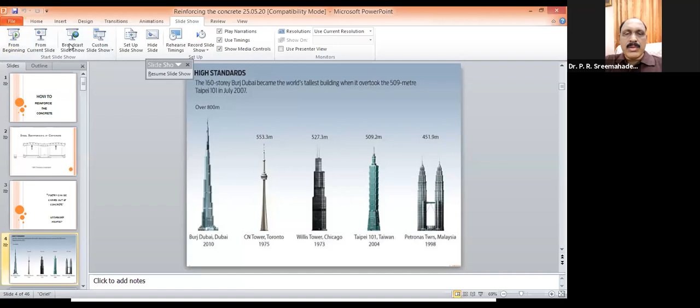See the screen - how to reinforce the concrete. Especially civil students at a BTech level, in the third and final year BTech, they study a lot regarding how to reinforce the concrete.

But long back, thousands of years back, there is a reference to cement in an Indian book which nobody knew about till recently. For example, there are 4 Vedas: Rig, Yajur, Sama, Atharva. For each Veda there is what is called an Upaveda, meaning a sub-Veda. There is a sub-Veda called Sthapatya Veda, which is an Upaveda of Rigveda. In Sthapatya Veda, there is a mention that a cementing material can be made by burning selected rocks and limestone and adding some softness to it. That is exactly the procedure which Joseph Aspdin used. So though it was given in Sthapatya Veda - the first ever written civil engineering textbook - since it was in Sanskrit and was not available to Westerners nor even to Indians because of the language difficulty, nobody understood this. But even now, you can go to the Sthapatya Veda and learn how cement was used in those periods, for fixing idols in temples, big statues, etc. Forget about that.

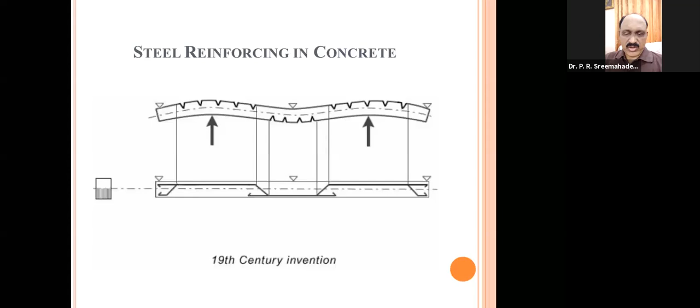But from all other physical concerns, we identified that steel is the best material for reinforcing. That is how RCC became synonymous with steel reinforced concrete. RCC stands for reinforced cement concrete, but reinforcement is by and large 99.9% steel from then to now, even now. Of course, the procedure has changed, that's all. Now come to the next slide. You see the next slide.

It's a quotation from Le Corbusier. Le Corbusier is one of the most vociferous and most imaginative architects the last century has seen. He's a French architect, and he has left a lot of marks in India. Many of the historical buildings in India have been by him. And the best example is the planned city Chandigarh.

Chandigarh is the best planned city in India. So many other planned cities are there, but Chandigarh is the role model for them. That was designed by Le Corbusier. So he has said that poetry can be carved out of concrete. Now let us see how this poetry will look. The next slide will tell you.

See the next slide. That slide is some of this poetry. 5 samples are given. The tallest among them is Burj Khalifa Tower. In that diagram, it is written as Burj Dubai Tower because till 2010, before it was commissioned, it was called Burj Dubai Tower, but then it was sold, so it is called Burj Khalifa Tower. That is the tallest with a height of 830 meters. And next comes CN Tower Toronto with a height of 553.3 meters.

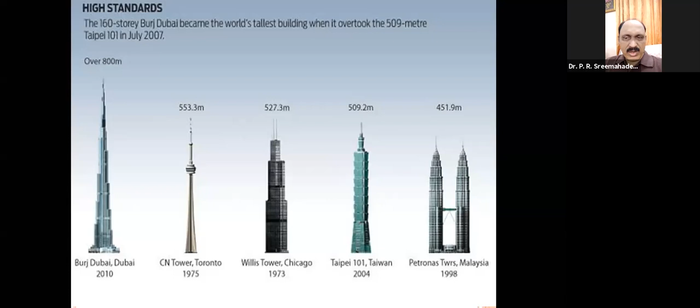Now come to the next slide. This you can see on the left side, that is a steel spire on top of the Burj Khalifa Tower. That is 244 meters tall, and it weighs around 4,000 tons, or simply 4 million kilograms of steel. And it is specially treated steel. It will not have rust. It is stainless steel basically, but structural stainless steel. There are two different types of stainless steel: structural and non-structural. Structural stainless steel is a costly affair.

For example, you know that the oldest iron pillar, which is rustless, is in India. If you go to Delhi, you can see the iron pillar, which is over 1,000 years old, which has not yet got rusting on it. Non-rusting. That means Indians were the first to invent stainless steel, but Westerners don't accept it. As per them, it was invented in the West. You can read in the textbooks. But we have got a standing testimony to a stainless steel pillar, standing still in the country.

Okay. Now, the total structure, you see the right side of it, that is the foundation of Burj Khalifa Tower. I just wanted to tell you how tall buildings have the foundation and top. That's why I explained this. Actually, this is not the best example to explain RCC that I am coming to. But you see the right side, it is supported on steel piles, round piles. Each pile having 1.5 meter thickness. 1.5 meter means around 5 feet.

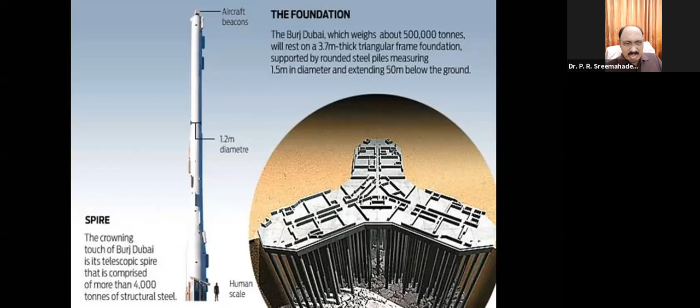Now coming to the next slide. All this that I told is just to inspire you to see that civil engineering can make such wonders. Now we are going to the ground reality.

You can just message whether I can continue with the same pattern or I have to change my pattern. Just put a chat to everyone whether I can continue the same pattern or you need a change in my explanatory style. Let me see what your response is. Okay. Everybody is saying that it's okay, they're listening, they can continue.

Now let us go to the real topic which I wanted to discuss today. Whatever I told so far, anybody could understand. But what I'm going to say hereafter, everybody may not be able to understand. Please forgive me because it is a hardcore subject. Only those with a basic civil engineering background can understand, especially those who have completed a BTech course in civil engineering, are studying final or pre-final year, or are working as or teaching civil engineering. Others can just listen. They may not be able to conceive it totally.

This is the cross-section of a T-beam, which everybody knows once they start the design of structures. It has two parts. The top portion, which is wider, is called the flange, and the bottom portion is called the web.

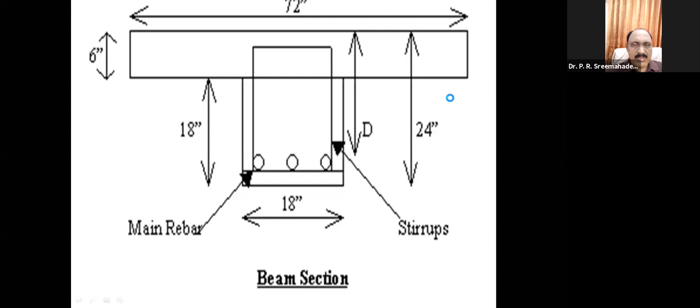Yes, this is a slide I was talking about. Normally, I don't operate the slides because while operating the slide, I cannot concentrate on the speaking. That's why I have asked the coordinator to operate the slide, so the coordinator can listen, and whenever I say next slide, you can come to the next slide.

Whenever you give a design to a contractor, the contractors may not be able to understand the theory well, but they can easily understand these drawings because they are used to using these drawings. So whenever you give drawings, that is meant for its use in the field, not in the room, they use it definitely in the field.

And earlier days we used to draw all these things by pencil or by black pen and used to give it. Then we used to duplicate or triplicate by taking blueprint or photocopy. But now we have got drafting facilities, softwares are there with drafting facilities. Now we go for software. Most of these drawings are done in AutoCAD software because AutoCAD is the best software for civil engineering drawing. Now software like BIM and all are coming with so many piecewise softwares, but even today, AutoCAD is not replaced as a software for building drawing.

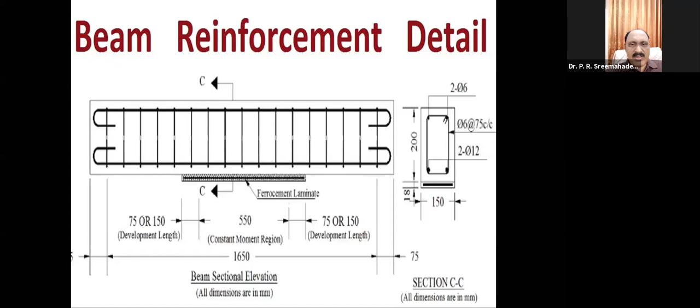But what we people do nowadays is we make somebody draw it, we check it and ask them to upload it. That you can do if you can afford it. But that's the secondary stage. Now come to the next slide.

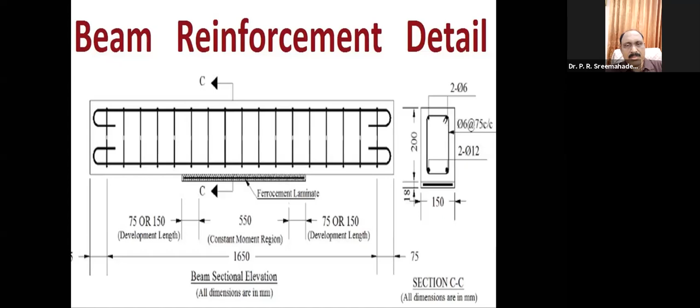See this slide. This is how a submission drawing will look like. This is only a small example. I'm not going to explain this drawing because I just wanted to make you see that such drawings we make. We have to make such drawings. Normally, earlier we used to make it in A1 or A2 sized drawing sheets. Nowadays, you can make it in A1 or A2 or A3 size. Even some of the corporations accept A4 sized drawings.

You can give it on AutoCAD itself, you can upload it on their website. They'll use it. So this is how it will look like. I'm not going to explain this because that takes a lot of time. I'll explain from the next slide onwards. Next slide, you have to change the slide.

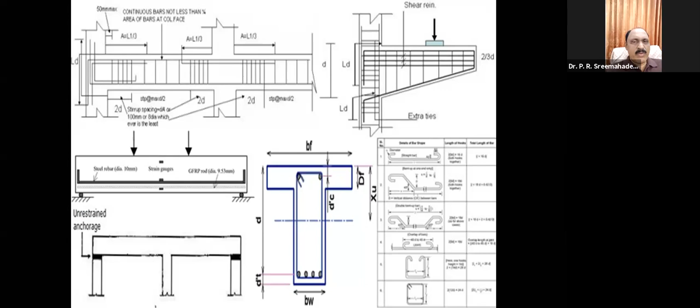There are different kinds of support in a structure: the hinged support, the roller support, the fixed support, the semi-rigid support. But this is a type of support we assume as a hinge for the analysis part. Wherever you go for construction, you cannot see this. You will see the bar from the column coming down up to the bottom and having a bend-up end there. That is what you usually see. But that is not theoretically correct.

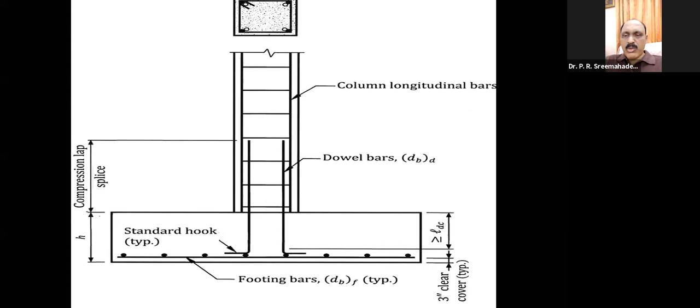You see the top style of reinforcement. That is what people normally give, but that is wrong. Structural engineers who study fracture mechanics, I think at BTech level fracture mechanics is not there. At MTech level you study fracture mechanics.

There, the stress concentration will happen and it will crack. Cracking of concrete is never advisable, especially on top, because any crack in the concrete is a point of entry of water and air. And if water and air enters concrete, the reinforcement will rust. And reinforcement rusting is such a ridiculous phenomenon, because a 6 mm bar can become a 20 mm diameter bar after rusting, and it will bulge out the concrete and the concrete will break.

Thereafter, the rusting of steel is an electrochemical reaction. If one end of a steel is rusted anywhere, the entire structure connected will be rusted, because all these steel bars are connected by stirrups and ties, and at least the binding bars will be there between the bars. Even the binding bar which we use there, that is also a conductor. So electrochemical means any conductor in between, it will conduct the rust. And rust, you know that electrolysis happens in the rusting, and it can travel from one end to the other. So nowhere in the concrete, crack is advisable.

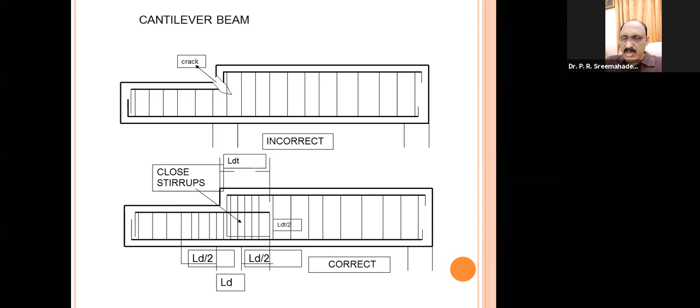Now coming to the next diagram. This is correct and wrong. Correct is the bottom diagram and wrong is the top diagram.

Structural engineers know how this crack develops because they know fracture mechanics. But BTech students will have a doubt why over the center support the crack is developing. I think normally they believe that over a support the crack may not easily develop because it is a supported plane.

What happens is, normally in any structure the columns at the ends will have less modulus of rigidity. Modulus of rigidity you have studied in design. They have less modulus of rigidity compared to the center column. So what happens is the deflection—see, any material deflects, whether it is a beam or column, it is supposed to deflect. I told that Burj Khalifa tower, one side amplitude is 4 feet so that it can move 8 feet apart.

Even a simple beam, for example you have got a beam of 4 meter span in your room, that can deflect more than 1 centimeter without anybody knowing it, because L by 250 is the permitted deflection. So even if your beam of 4 meter span deflects by 1 centimeter, there is nothing wrong in it because by its nature, by its design, it is permitted to deflect.

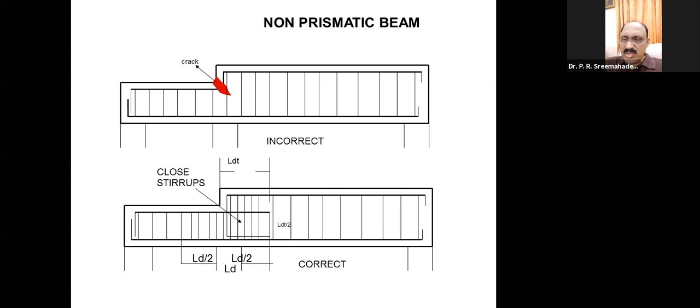For example, in slab design, there is a typical type of slab with grid beam design. In one hotel in Palakkad, I have designed such a beam because they didn't want a column inside. So they wanted a grid beam so that there is no column in the hall. So grid beams can be used for high span.

For example, any span more than 5 meters is uneconomical for a supported beam. If it is more than 5 meters, the depth of the beam will be very heavy. Earlier in working stress method, a 5 meter beam used to have around 40 to 50 centimeters depth. But now the depth can be reduced because the limit state design reduces the depth. One more thing is the material quality has changed. Earlier we were using mostly M15 concrete, but nowadays we are using M20 and M25 concrete, and steel also.

At those times we were using mild steel. Mild steel has either 250 or 320 range permissible tensile stress, Newton per millimeter square. Now we are using high yield strength steel, HYSD steels and TMT steels. Available TMT steel now in Kerala is around 600 Newton per millimeter square, almost 2.5 times what we were doing then. So because of that reason, now the size of the cross section has reduced.

But even then, once I had a requirement for designing the Anakotil of a temple. Anakotil is a hall where the elephant stands and so many people will be standing. So its span has to be around 20 meters, and they wanted it without beams. So for such things we can go only for grid beams and grid slab. So such cases are many.

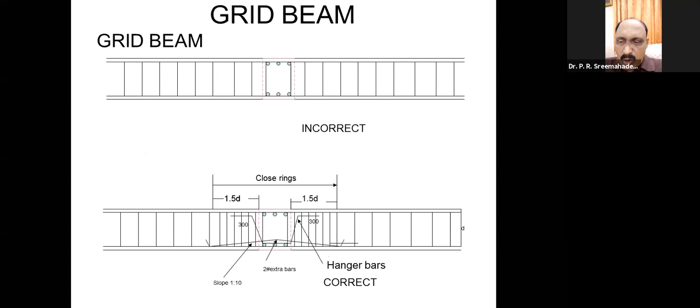Now come to the next slide. This is the case when the sub-beams, also called secondary beams, have a lesser dimension or lesser depth compared to the main beam. Say for example, the main beam is 30 centimeters, and the sub-beam web is only 20 centimeters - it will look like this. See here how it is done. Again, self-explanatory - those who have studied the fundamentals of engineering graphics can understand this. Just see it.

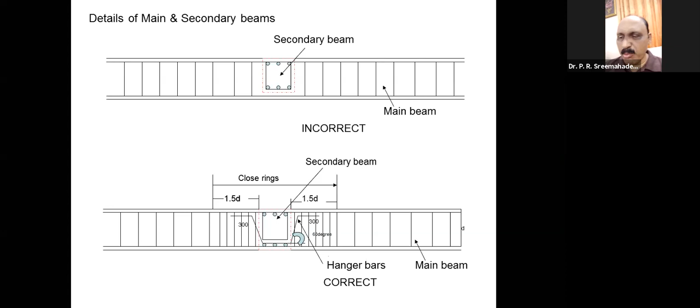But never do that theoretical bending, it is dangerous, because due to many reasons, the point of contraflexure may have a slight change - that's the first thing. Second, nowadays we don't bend the bars like this, but I've shown bending because it's easy to show. You can just cut the bars, that is what people do - cut it at bottom and cut it at top, but never at the same level. You should cut it with extra development length on both sides.

Otherwise, there is a phenomenon in concrete called pull-out, which is very dangerous. So many research theses have been done on the pull-out phenomena - I think in Anna University itself, I could evaluate 3 PhD theses on pull-out behavior of concrete. So definitely the bars will pull out. Nowadays the pull-out danger is less because we are having twisted bars - most of the HYSD bars or TMT bars have a Tor mark on them, a twisted mark, which improves the bondage. Bond strength will be improved compared to mild steel, which was very smooth.

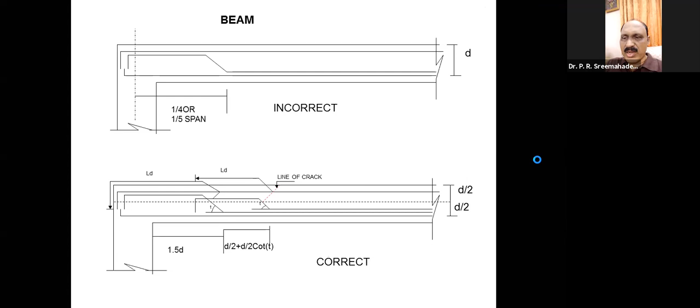You see here, most people just take span by 4 for cutting - span by 4 means 0.25L. If you take 0.25L, they feel it is all right, but it is true only for long beams. If the span is very less and the load is very high, especially in beams like bridge beams, this becomes very dangerous. Say for example, a span of only 2 meters but the load is very heavy - cutting it at 0.5 meters will not be safe for the beam.

So it is suggested that even if you see, for example, the bridge, the depth of the beam will be very high. I just got an example. Recently, I had to design a bridge where the depth of the beam is almost 2.5 meters. See, your height will be around 1.5 to 1.8 meters. The depth of a beam in that bridge is 2.5 meters. So bridge beams are normally like that.

Even with the latest limit state we are designing, earlier the bridge beams used to be 3 or 4 meters sometimes. There are bridges like that. But pre-stressing can reduce the depth of the beam a lot. That's why we prefer pre-stressed beams nowadays.

Most of the newly built bridges are pre-stressed, and you could have seen that the metro and all are using heavy beams, but the depth is not more than 2 meters anywhere, 1 to 2 meters only, because it is all highly pre-stressed with high quality tendons with high yield strength capacities. That is different. But these are all usual things.

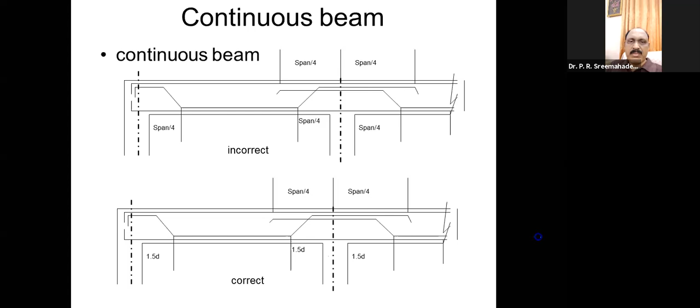If at all you see any crack, fill it with filler material immediately, even if it has no structural purpose. You know very well it's not going to affect the structure immediately, but you close it. So many gel materials are available now. Nowadays in the market, you get spraying type materials, all nano materials, which you can just spray over to fill the gap so rusting can be prevented.

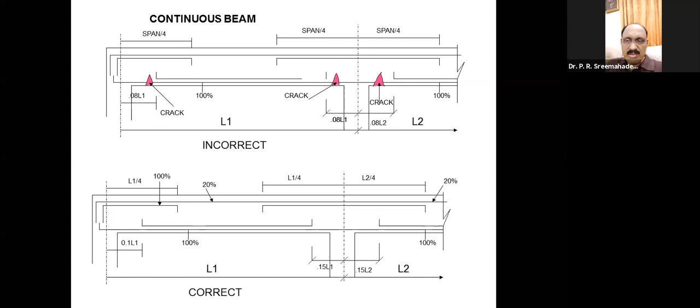See the correct method. The steel has to come to the support up to 0.1 L so that the crack can be avoided. At the bottom, the steel coming in is more important because the crack is at the bottom, not at the top. The reverse also is possible. The crack can be at top if the top reinforcement is not sufficient at the support. That also can happen. Just see it. Now come to the next slide. This is self-explanatory. The top diagram shows how people do it, and the bottom diagram shows how it is to be done. No need for explanation.

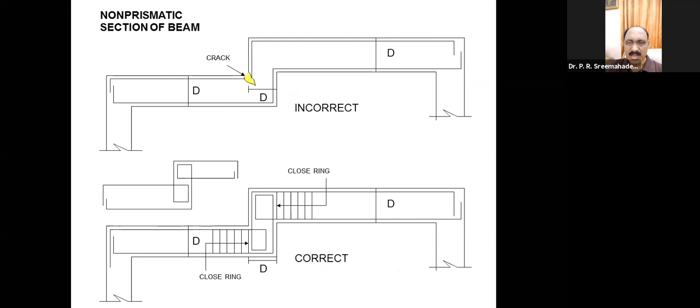The crack positions I have colored so that you can immediately see; these are all not imagination. I have seen them in most of the places. Because, you know, while working as a teacher, we were permitted to do consultancy also. So we were consultants to government as well as private organizations. And while going to the site for checking the reinforcement, we see all these mistakes and we ask them to correct. Many places we had to ask them to take out the reinforcement and then redo it.

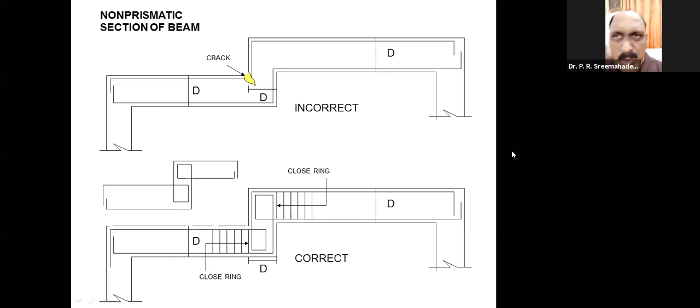Because after construction, when something goes wrong, we have to go for inspection. Then we find that all these mistakes are there. So many buildings we had to even repair the roof or remove the roof. That can be avoided if the reinforcement is given in the proper way. That is why I am giving this information, so that this mistake is not committed unaware by the engineers, because these are not available in textbooks.

Whatever I have discussed so far, it's not available in textbooks. You have to learn by this. That's why I told you will get the recording. You can go through it when you get enough time, especially field engineers. This will be useful to you. Now come to the next slide.

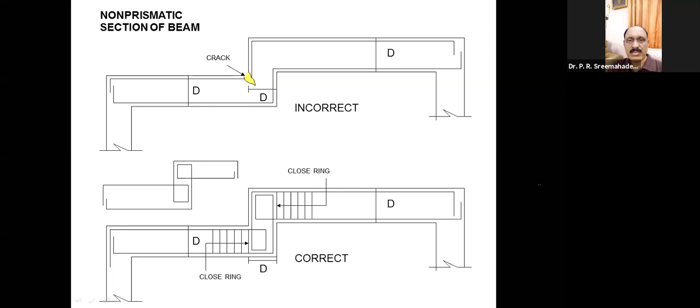How to reinforce a cantilever. These types of cantilevers come mostly; even a sunshade in a building is a cantilever like this. Even a sunshade, then porch, car porch will be cantilever. See how the reinforcement is given. Main thing which you have to note here is there should be sufficient steel. Steel should not be less. You know that if Ast is the tensile steel which you use in this section, at least 0.5 Ast should come up to the top end. And then minimum 0.25 Ast.

Ast is the area of steel in tension. Similarly, the most important thing is you see the right side. That anchoring bar should not be cut at top. It should come to a depth of Ld, development length. Ld, I told, is around 50 D, 50 times the diameter. For example, if you are using a 6 mm bar, Ld is 300 mm, approximately. It's 47 D, but we approximate as 50 D.

Okay. You see there. This is a mistake commonly seen. That is why wherever you go, the car porch and the sunshades will have a break, a crack at the joint with the wall, because the reinforcement is like that. Simple care can overcome many of the mistakes. See the next slide.

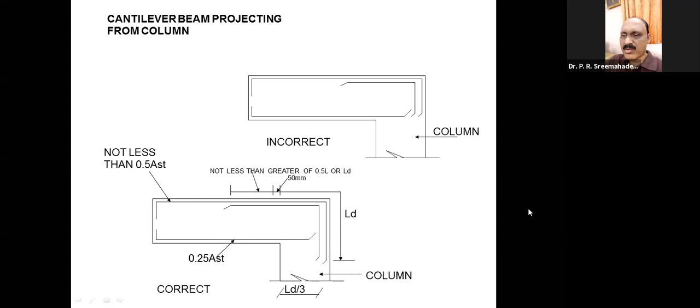A sloping beam. Yes. This I am very particular about, because at a time when that Baker model construction was progressing, many of the local agencies went for such type of folded plate construction. This is called folded plate construction. I had inspected so many schools where the roof was cracked like this and water is leaking. And instead of removing this roof, I checked the reinforcement and asked them to cap it with ferro cement on the top. If you give a 1-inch thick layer of ferro cement, you can immediately prevent leaking.

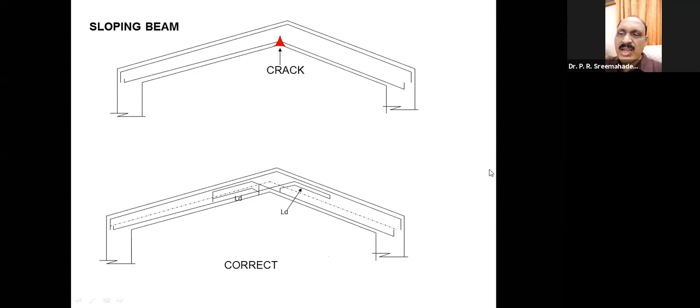But ensure that it is structurally safe. To be structurally safe, it has to be like what is given at the bottom. That is the correct method. You see that? Very easy to give it, but you should know it, that's all. Nowadays, I insist the contractor that you have to do like this. Maybe steel may be around 20% more, but it has to be, otherwise the roof will crack. And moreover, in buildings like schools where kids are sitting below, you cannot permit the roof to leak and crack even one time. That's why this is very essential. See the next one.

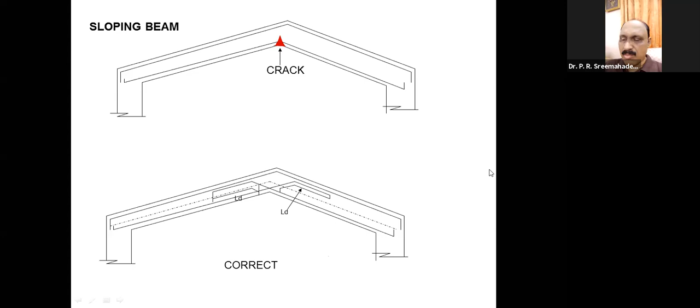Haunch beams. Many places we give haunch beams because the stress concentration at the joint is very high. Beam column junction is a very important area of study. So many theses have come out. If you search on it, you can see so many PhD theses on beam column junctions. Why should I go to that level? Even in my PG, I was studying the semi-rigidity nature of this beam column junction.

So it's a point of a lot of study, and you can see that a crack will develop as shown in the top if the reinforcement is given that way. You see the reinforcement there that is going from one end to the other end. Simply it is bent. You should not give like that. Give the reinforcement as given at the bottom side.

The difficulty I know with many engineers is they cannot learn these things from textbooks. This can be learned over a lot of years of experience, maybe 20, 30 years of experience with designing and supervision. And by the time somebody learns it by themselves, it will take a lot of years. So it's better you learn from somebody's experience. And of course, these things you can take care of in your construction. See the next slide.

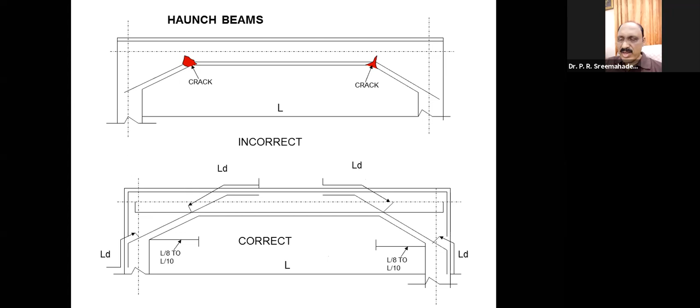This is just to show how the stress concentration takes place. The red colored areas are where the tensile stress will be the highest, that corner area. Okay, the stress diagrams are also shown there: what is the tension and compression. Now come to the next slide.

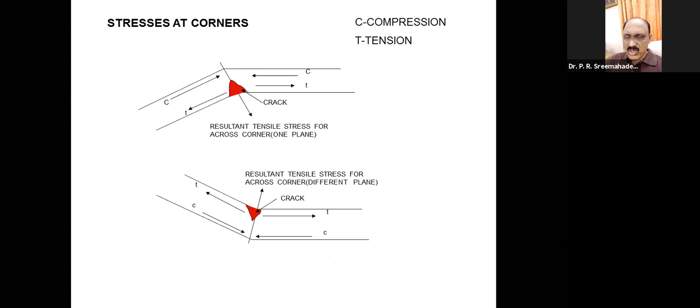support span. But the reality is, if the beam is more than half a meter deep, more than 450 millimeters or even more than 500 millimeters, you may wonder where this half a meter deep beam comes, because nowadays so many commercial buildings are coming, malls, industrial buildings, bridges, everywhere more than 50 centimeter beams are coming. You may not be seeing it because some wall will be attached to that. That's all. The beam will be very, very deep. In such beams, if you don't give lateral reinforcement, the beam becomes very weak.

And obviously, in deep beams, there's a theory that the longitudinal stresses can also have an impact on the lateral stresses. Those who have studied gantry girders will be knowing it. Most of the gantry girders we design with steel because it is equally effective in longitudinal and lateral stress. But if at all you have to go for a gantry beam with concrete, definitely this will become a concern. Not only that, in any deep beam, you have to give side reinforcement also. And a part of this reinforcement can replace the top steel and bottom steel. The remaining has to be extra.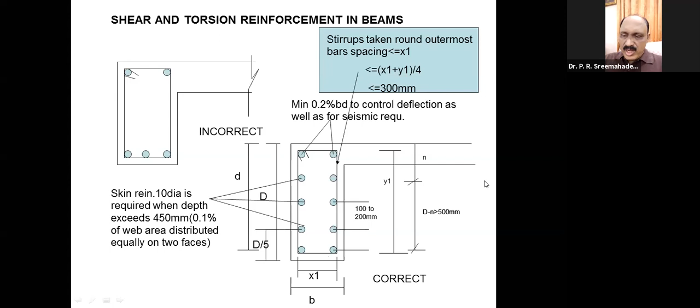Design procedure I am not going to explain now, but spacing is given in the equation there. Stirrups taken around are also given by the equation there. And what should be the minimum requirement is also given there. Minimum requirement is 0.2% of the cross-sectional area. Of course, I could have explained all these slides in a long time, but time doesn't permit. Moreover, you'll be given this, you can have a self-study. If you don't understand any of the things given here, you can take any good book of RCC and verify it. Only thing is, the theory will be given in the books, but not these diagrams. Okay. Now come to the next one.

Cantilever with point load. Normally in cantilevers, we give top reinforcement and bottom reinforcement. If they are having heavy point load, this can come, for example, the gantry girder is one best example. When an RCC column is there on the side, there will be a cantilever like this, on which that blue color you can take as the gantry girder, which is resting there. A gantry girder will have so many tons of load, many times 20 tons, 50 tons. So when such a load is working, you should not limit the reinforcement to top reinforcement and bottom reinforcement.

You must definitely give side reinforcement to take extra shear, and that should be given for a total depth of 2/3 of the effective depth of the beam. That is the rule. And this also, in one or two books I have seen that this is given in explanatory notes, but not correctly with a picture like this. So understand this. Now coming to the next one.

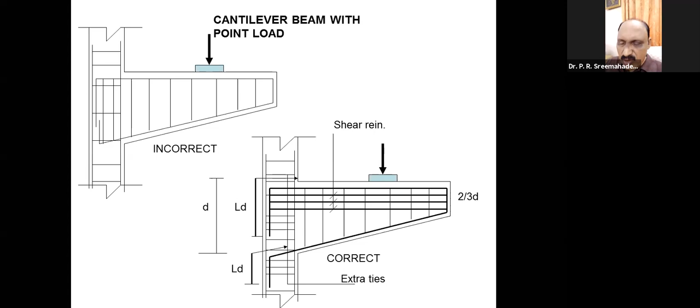When an opening is given in a beam. In earlier days, we were not concerned about these openings because we never used to cut a beam. But that is not the case now. Now people want the duct. Theoretically speaking, below the neutral axis and above the bottom reinforcement, the concrete is only a supporting material, not structural material. You can replace it with some other material also if necessary. But since we cannot have the homogeneous nature of the frame, we are having concrete. So there is no theoretical mistake in cutting the concrete.

You can cut the concrete just below the neutral axis. And if you want to lift the neutral axis up, you can have the flange thickness more. There are methods for that. When you cut the section, you see the top diagram, that is how people reinforce it. And you can immediately see after 1 or 2 years that red colored cracks will be developing.

See that? So what is the way out? Many people have asked me how to handle it, because nowadays cutting beams is very common. Your pipes, your electrical ducts, your drainage ducts, etc., you are taking through the beam. So the beam has to be cut. And let it be cut.

There is no problem. While constructing itself, you keep some hollow material there and just remove it, and you get the cut portion. That's all right. And the web is cut. But it should be done as given in the lower diagram. Keep in mind. Otherwise, these are very dangerous, because most of the time I've seen that they make these cuts at different places.

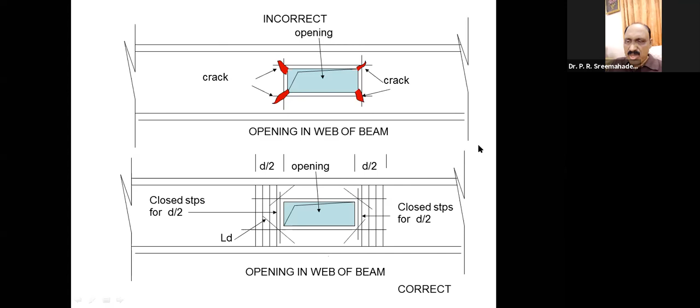Truly speaking, the beam is not to be cut. It will reduce the strength of the beam. But due to unavoidability, we are doing it. See that? Okay. Now come to the next diagram.

Beam column junction. Beam column junction, I told you, is a point of weakness in any structure. That's why so much research is going on in it still. I'm not going into this in depth because this is one subject where I have done almost 6 months of research work for my PG. So just understand this much.

In a beam column junction, the stress concentration is so high that the reinforcement has to be placed like this. Instead of just having the reinforcement splayed for a little length, the reinforcement at the end of the beam has to go to both sides sufficiently deep so that the pulling out effect is not there. First thing.

Second thing is, at the beam column junction, lateral forces are quite common in the beams, and the beam should definitely have lateral reinforcement up to a distance of at least LD. At least LD. LD is development length. That is what the lower diagram says. Now come to the next diagram.

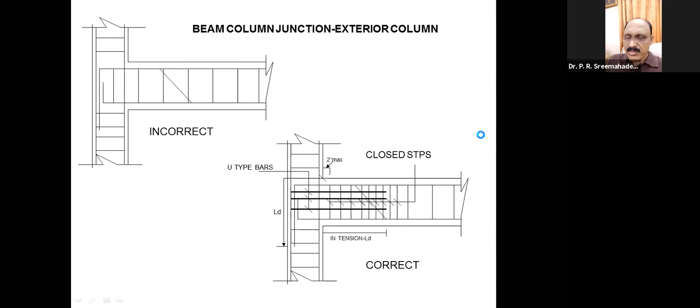This is a common mistake I see in the field. And this is mentioned in IS 456, but many people don't care about it. It is clearly mentioned that when you have to splice the reinforcement, that means you have to cut and continue the reinforcement of a column, the lower reinforcement comes outside and the upper reinforcement should go inside.

Then only the core, meaning whatever concrete is between the reinforcement, is called the core. You see here on the right side, the correct position is given. The upper reinforcement is going inside and the cover is coming on the outside, and that core can fully take the load. In the left case, the core cannot fully take the load because the upper reinforcement can have a punching action. It is carrying load. It can have punching shear and the column can fail. So the left one is incorrect and the right one is correct.

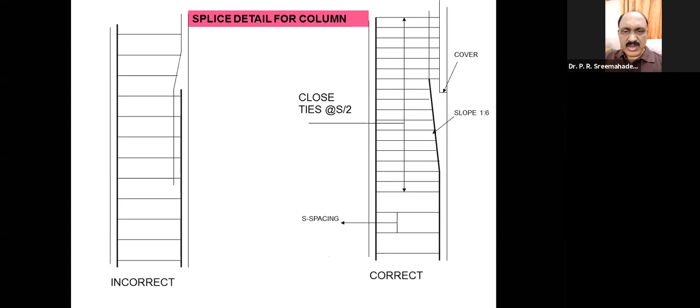This is given in the IS code, but people don't care about it much because it's not explained this way. Moreover, this is called splicing of reinforcement. Wherever the splicing is there, the spacing has to be only half the spacing. Suppose S is the spacing elsewhere. Here the spacing, at least for a development length on both sides, should be only half of that. Now come to the next reinforcement.

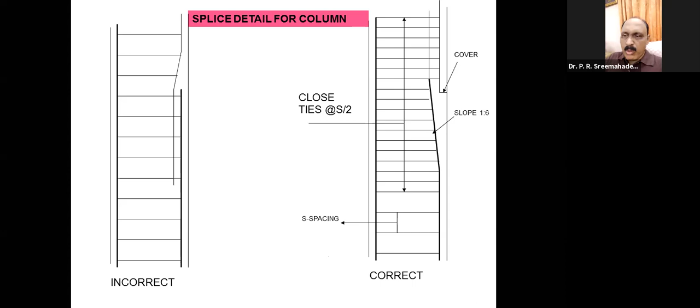Suppose you have to cut down the size of a column when you go up. This is a very common thing in tall buildings. For example, I have designed a building at Palakkad which is only 6-story. In my analysis, I found that after every 2 stories I can reduce it; at the bottom level, the size of the column was almost 1 meter, and at the top it requires only around 40 centimeters. So this 1 meter to 40 centimeters has to be gradually cut at different stages.

Remember, cutting should always be done just above a floor. Below the floor, it should be of the same size. Just above the floor, you can reduce the size. You see diagrams 1 and 2. But remember, at that time you have to give the reinforcement as given here. Otherwise, cracks will develop there. You should have an extra splicing there so that the dowel bars go upwards and the main reinforcement of the column comes downwards.

I'm sorry that those who don't have a fundamental knowledge of reinforcement will not be able to understand these things. I'm helpless in that case; for them we can have some base level discussions later. This is for those who know it. Just see the second diagram and understand it. The reinforcements are all given.

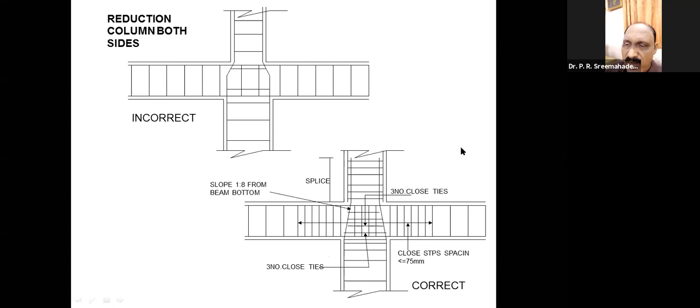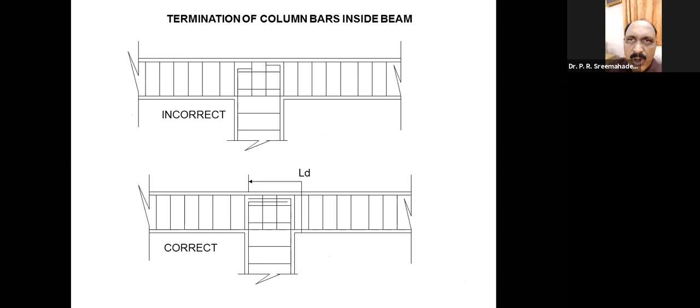Now come to the next slide. Termination of columns inside beam. Say for example, you are having only a single-storied building which is on columns. When the columns end at the slab or beam, it has to be cut. So while cutting, the top position is the incorrect method. Incorrect method means you just cut and bend the top reinforcement of the column. You just bend the main reinforcement.

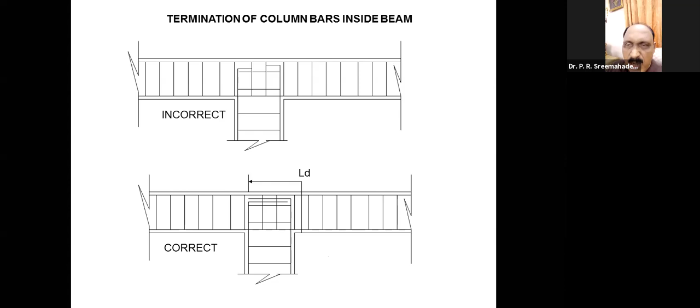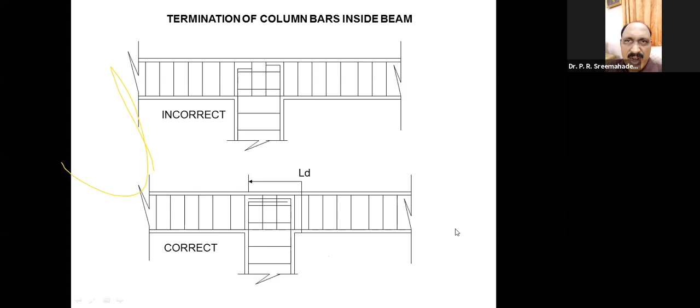The crack mechanism, I don't know whether the students have studied that failure mechanism of beams and columns. We are studying so many mechanisms, beam mechanism, column mechanism, combined mechanism, etc. So here, the combined mechanism will be more dangerous. Obviously, a framed building is very effective in containing earthquake. A very well-framed RCC building can contain an earthquake even up to 8 to 9 Richter scale.

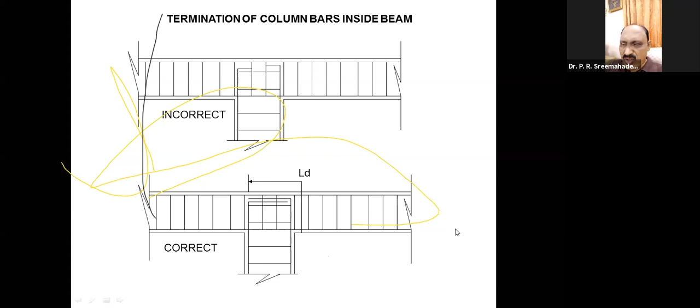But an ordinary brick-walled building can take only up to say 6 to 7 on Richter scale. Even 7 is very difficult. That is why in RCC framed buildings you have to be careful; anyway we are spending on concrete, then why not spend something extra, 0.1% extra on steel, so that it can become stronger. See the next slide then.

And out of different earthquake regions, Palakkad is a very prominent destination for earthquake, because the basic theory of earthquake is that wherever fault planes are there in the rock, earthquake is more prone. And there is such a fault plane going through the Palakkad Walayar area, and there is such a prominent fault plane going through the Trivandrum area, near that dam, I forgot its name.

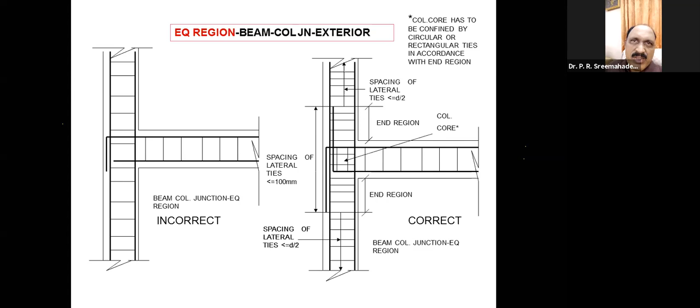There is an arboretum and all in that dam. I'm not recollecting that name. It's in the border of Trivandrum district. Not Neyyar Dam. Somebody has put Neyyar, not Neyyar Dam, that dam name I forgot. It's on the way to Tenkasi from Trivandrum. It's a border near Aryankavu. I forgot it. Anyway, it doesn't matter.

If the earthquake occurs there, even Trivandrum city will be affected. I once cautioned this to the people wherever fault planes are there. You would have seen that last week there were so many small earthquakes in Idukki district, but very small. There is nothing to be afraid of. Only 2 to 3 range. It becomes dangerous only above 6.

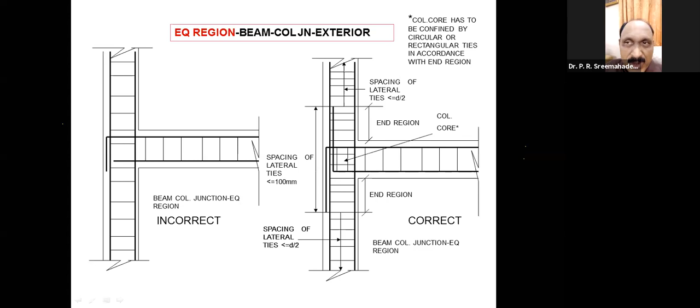So dangerous to dams and all. But earth dams, like Mullaperiyar Dam, can break even below 5. But Idukki Dam cannot break at that level. It can break only at the range of say 8 or 9 plus. Okay. Now coming back to the next one.

Again, one more diagram I've shown for earthquake range. In earthquake range, all the columns should have close spacing of the shear reinforcements, especially at the end supports. That is what this diagram shows. Spacing of shear reinforcement in columns should be very close in the end region compared to the normal place. That's always to be careful.

Earthquake has got a very real effect on shear. Shear stress will be more in earthquake region. So all that shear reinforcement, it is better to give in earthquake regions almost 25 to 50 percent. There is a detailed workout mechanism for that. That I'm not telling here. I'm just introducing you.

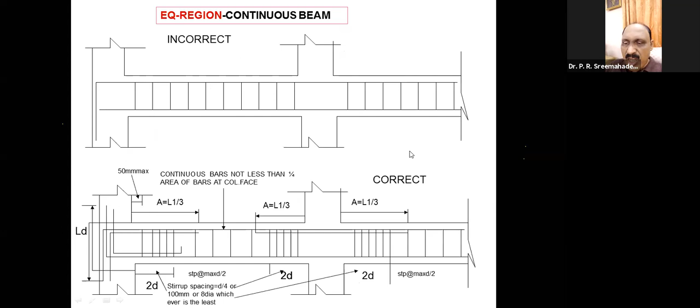It's required. Now coming to the continuous beam in earthquake region, it should be like this. See, the top gives a continuous beam in an ordinary case, and the bottom diagram gives how continuous beams should be in earthquake region. You see there, U-shaped bars are given at the end of the beam in the earthquake region. Otherwise, in the earthquake region, the column and beam can separate.

If you have seen any earthquake failure on TV and all, you can identify some of the joints will be separated. So that joint separation can be avoided if such reinforcement is given. Now the next slide.

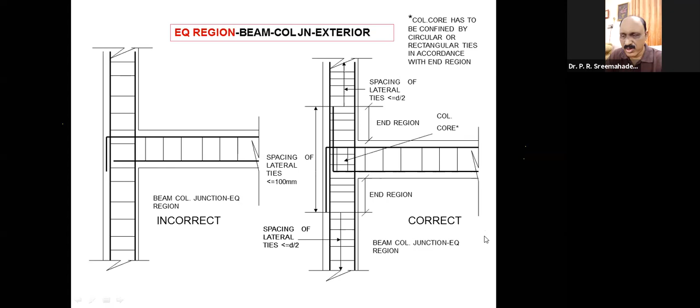Maybe whenever there is no earthquake or no pullout, why are our buildings not cracking still? I remember my professor who taught me soil structure interaction at Bombay. He used to tell the reason why the buildings are not collapsing: because the soil is a continuous

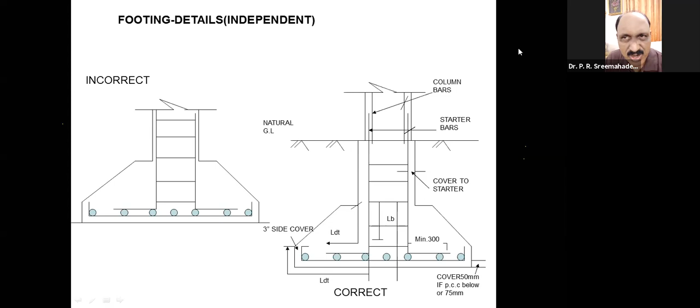material. Being a continuum, it has its own induced spring nature. So the soil structure interaction we simulate by spring action. That is why if you go for any advanced textbook on soil structure interaction, the spring model is there. Because the soil has got that flexibility, the footing is not cracking. If the footing is on rock, it would have definitely cracked. That is just an escape mechanism.

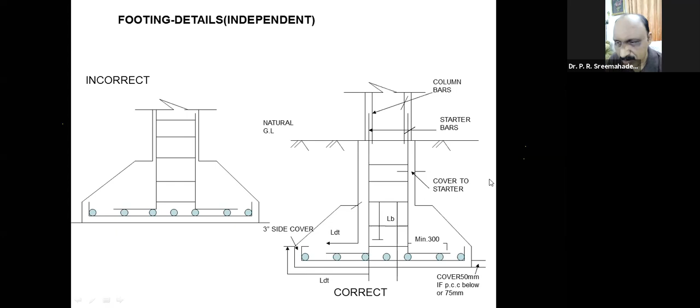Now see the next diagram. It's a typical reinforcement detail of a hammer foundation or heavy machine foundation. Most of the engineering colleges will have heavy machines like UTM, CTM, etc.

Many places when I go, I see that the footing has cracked. The reason is they make the reinforcement as shown on top. They make the reinforcement as shown on the bottom - that foundation, machine foundation, will not crack. This the college administrators can keep in mind whenever you go for a new machine foundation. You have to resort to this material.

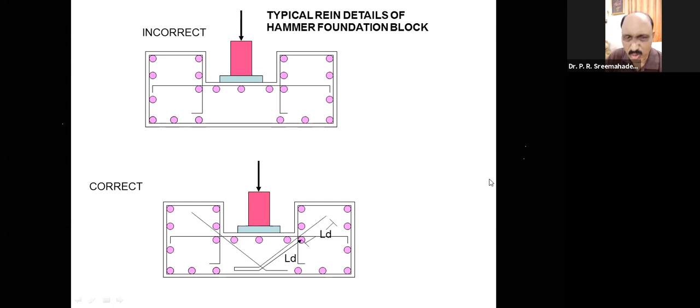Now coming to the next slide. Whenever the beam is having a trench, it is required heavily nowadays because you will have to take something over it. So earlier days we never used to make a trench in a beam because a trench is a weak thing in a beam.

Trenches are always - suppose you have a very strong man and his legs are weak, what is the point? Like that, in a beam you are making so much strength and you are giving a cutting on it, and that is becoming a weak point. It's very useless. But if it's very necessary, you can go to the reinforcement pattern given at the bottom side. Bottom gives the correct reinforcement.

Just see it, these are all self-explanatory. I don't have to tell you why this reinforcement, how it is given, etc. They demonstrate themselves - for our seeing is believing. Now see the next one.

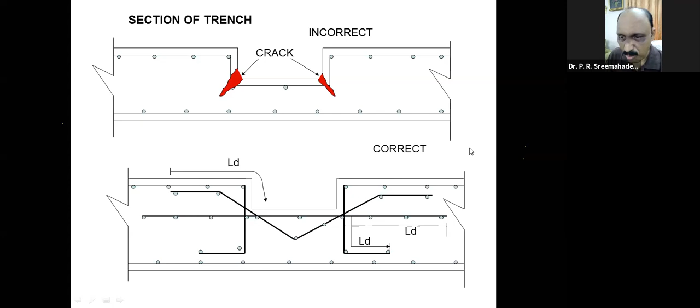A staircase with a waist slab. The top is the usual pattern we give. That is why in many of the houses, just at the beginning of the landing, above the waist slab, you can see cracks. For example, some period when I was working at Trivandrum, my quarters was having a staircase where both the ends of the waist slab were broken. Immediately I could understand the reinforcement pattern is this.

So to avoid that, you should have the reinforcement pattern which is given at the bottom. I'm not telling the bar diameter, bar spacing, etc., because that will depend on the span of the staircase and how much thickness you are giving to the waist slab, etc. That is different, design I'm not telling - how the pattern of reinforcement should be like.

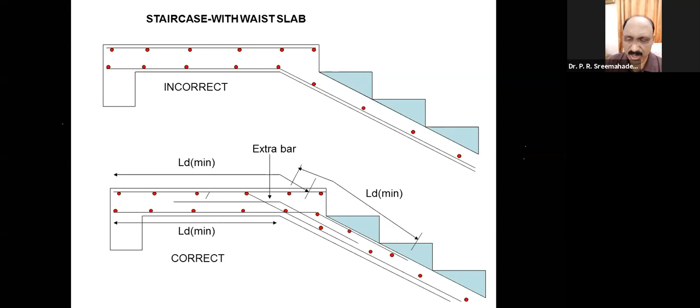Now coming to the next slide. This is a slabless staircase. Instead of a slab, we make the step itself a slab. This is one method, see the top diagram. Many people simply bend it like that and give it.

It is very wrong. I think in 1 or 2 places I have seen such a staircase which is shown at top, which hangs like a rope. It has formed into that - it's like a catenary, so that parabolic shape it is attaining by itself, because the reinforcement is given at the top. It is very dangerous. Don't give it.

One method is to give stirrups on both sides, both ways - vertical stirrups. See the stirrups on the right side, vertical stirrups and horizontal stirrups, and connect them strongly, so that once the concrete is put, they will be stable.

Till the concrete is put, they will be a bit mobile, but once the concrete is consolidated, there is one more better method. The other better method is to give the bend at the bottom side, not the top. When I advise somebody to make the staircase like this, I advise only this method, not the other. This is stronger and will never fail even in an earthquake, whereas the other one can fail.

In an earthquake, the stair is one of the most important elements because evacuation can be done only if the stair is there. So in an earthquake, the most important things are your stair and your roof. This bottom one is the correct one, not the top one. The top one is just showing how the reinforcement is bent. Between alternate one and alternate two, I suggest alternate two as the better option, but alternate one is also good, not bad.